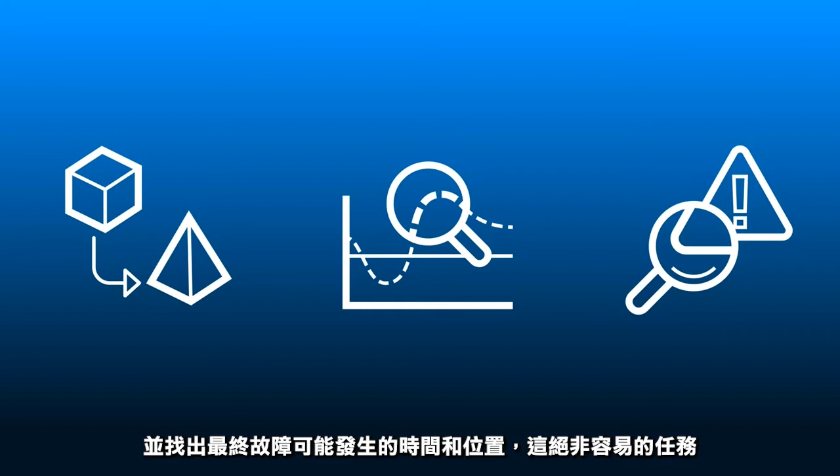When you test your products virtually or in the real world, naturally you're exploring numerous design options, evaluating how long they will last, and finding out when and where ultimate failure may occur. And it's no easy task. When simulating numerous physics and loading scenarios, collecting and making sense of all the data can be daunting and time-consuming.

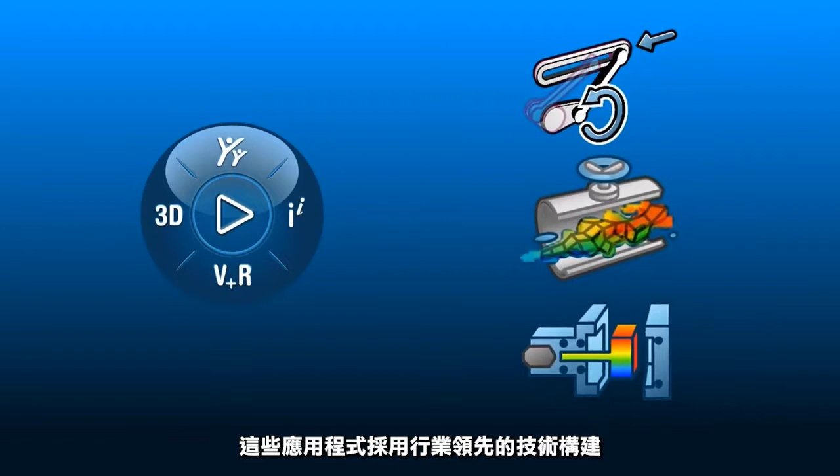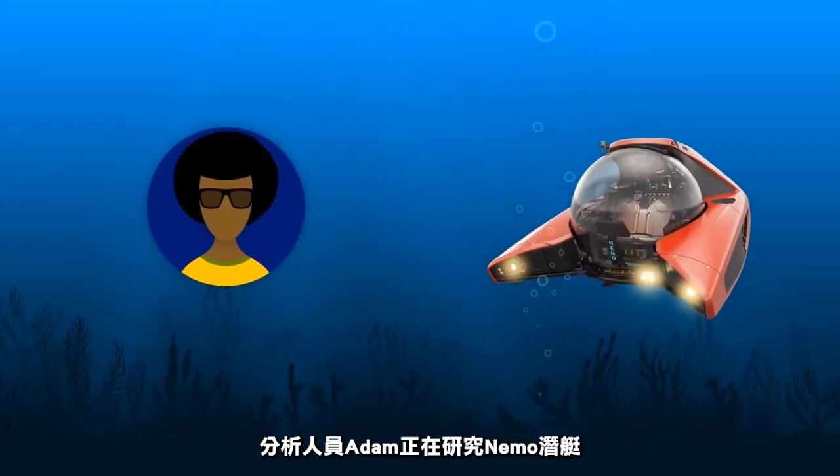This is especially the case when the design and analysis tools are disconnected or limited. But there is a better way. The 3DEXPERIENCE platform provides a collection of best-in-class simulation apps built with industry-leading technology, including Abaqus and FE-Safe, and connects seamlessly with SolidWorks. Adam Analyst is working on the Nemo submarine to help satisfy their safety and certification requirements.

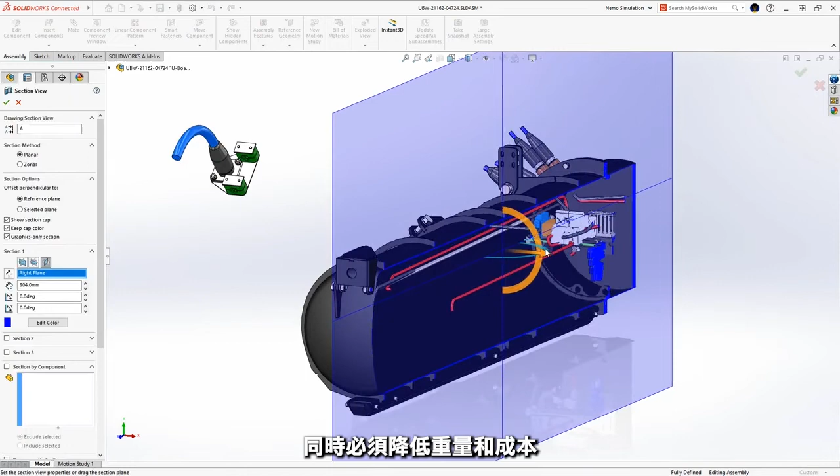When it comes to the battery compartment and skid, he has a few remaining tasks. With a depth rating of 100 meters, it is critical that the battery compartment can withstand the pressures beyond that depth to ensure safe operation. At the same time, weight and cost must be reduced wherever possible.

Adam considers the thickness of the steel tube and stiffeners, and defines the associated dimensions as parameters to be optimized. He saves the updated model to the platform and launches the Model Assembly Design app to start the simulation process.

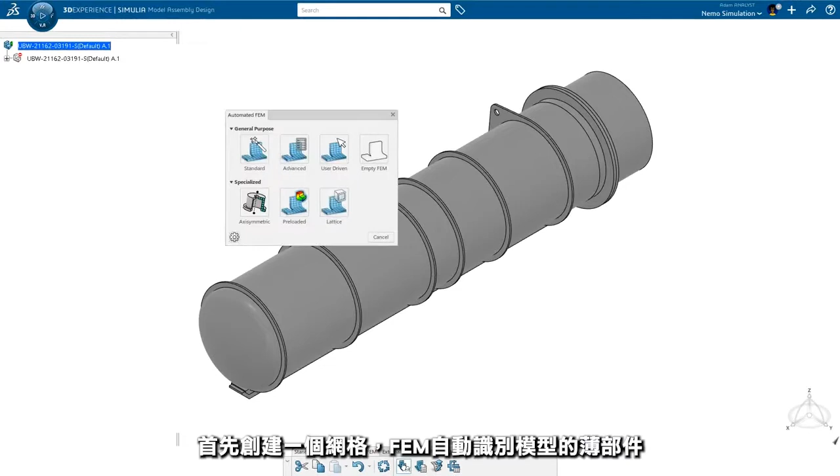First, a mesh is created. The automated FEM recognizes the thin components of the model and creates mid-surfaces and associated shell mesh bodies all in one command. Next, Adam creates the structural scenario that defines the loads and boundary conditions to simulate the maximum designed depth rating.

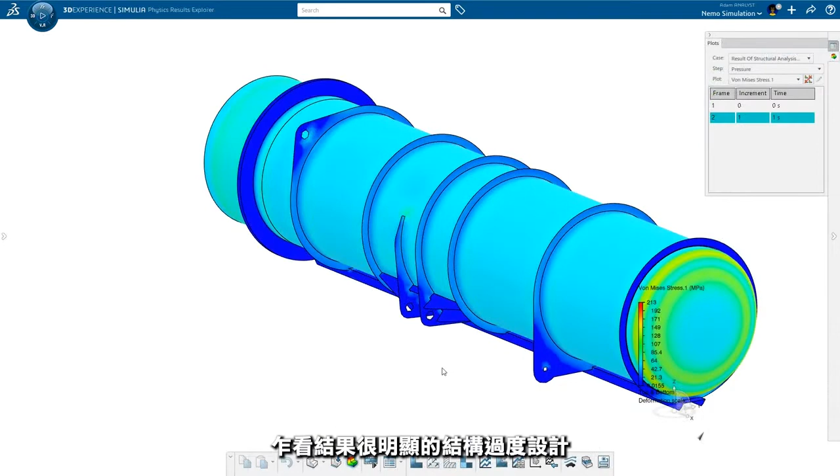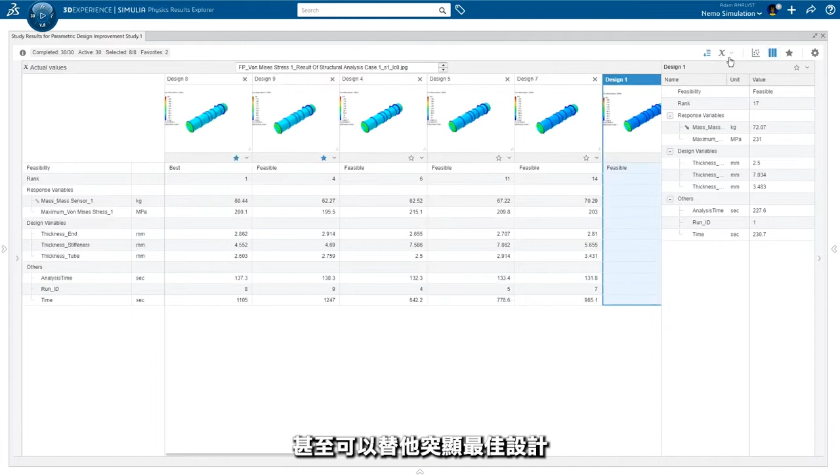At first glance of the results, it is obvious the structure is over-designed. Adam launches the Parametric Design Study app, selects the parameters and goals of interest, and lets the computer do the rest of the work. When the study is done, Adam can easily interpret and compare the performance of the various configurations. The best design is even highlighted for him, and with one click, a new model and study using the optimal parameters is created, so Adam can take a closer look.

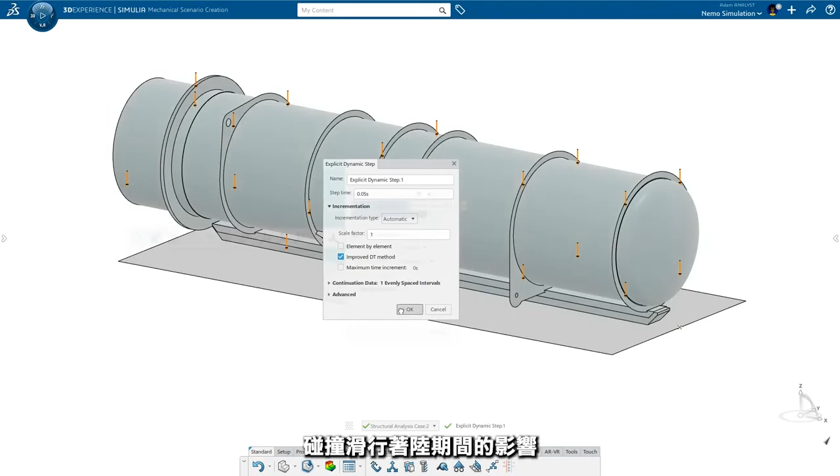But he has additional tasks to complete first. The pressure load on the battery compartment happens multiple times throughout the life of the Nemo. Another loading condition that repeats is the impact of the skid landing during storage. To simulate this secondary loading condition, Adam creates an explicit dynamic study to accurately capture the rapidly changing stresses of the landing cycle.

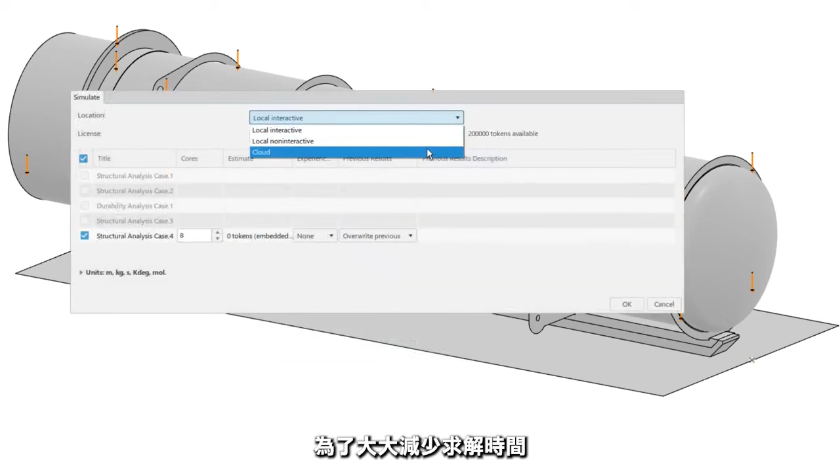How exactly does the skid come in contact with the floor? Adam lets the solver figure that out with one simple yet powerful general contact interaction. To greatly decrease the solve time, Adam chooses to run the simulation on the cloud, leveraging its high-performance computational power. Adam can even shut down his computer while the simulation runs.

The stress values are within an expected range. But how many times can the Nemo withstand both this and the pressure load? To reveal the answer, Adam sets up a durability study.

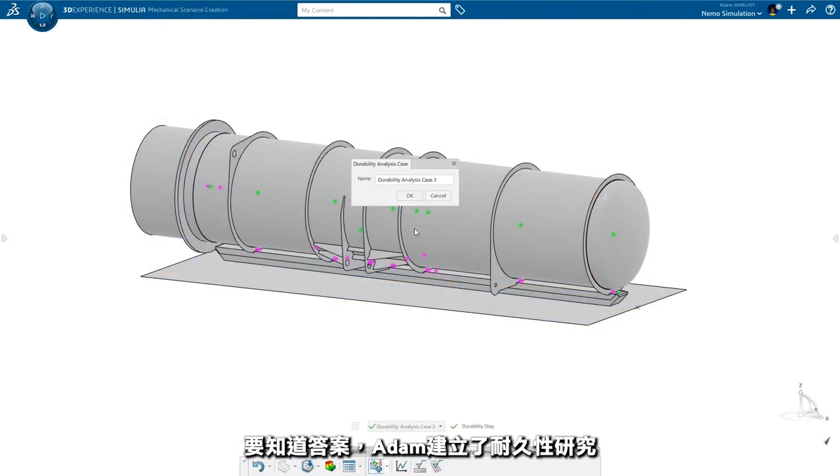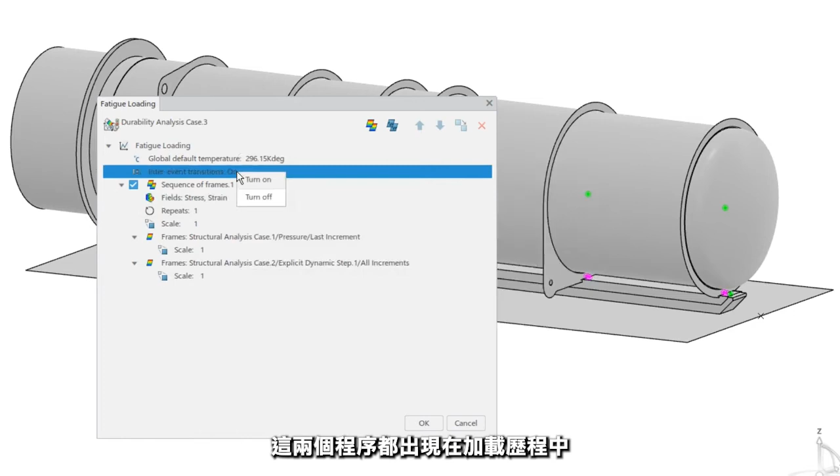He defines a fatigue loading that captures both events. For the explicit dynamic results, he includes all increments to account for the fluctuations in the response. Adam also includes both stress and strain in the calculation to improve the accuracy and solve for both high and low cycle fatigue. Both sequences occur in the loading history, but they are exclusive events, so he turns off the inter-event transition option. Lastly, he defines the base surface finish and solves for the results.

The results are not only available to Adam, but they may be viewed by other collaborators from their internet browser, so everyone can get the latest information instantly from one place.

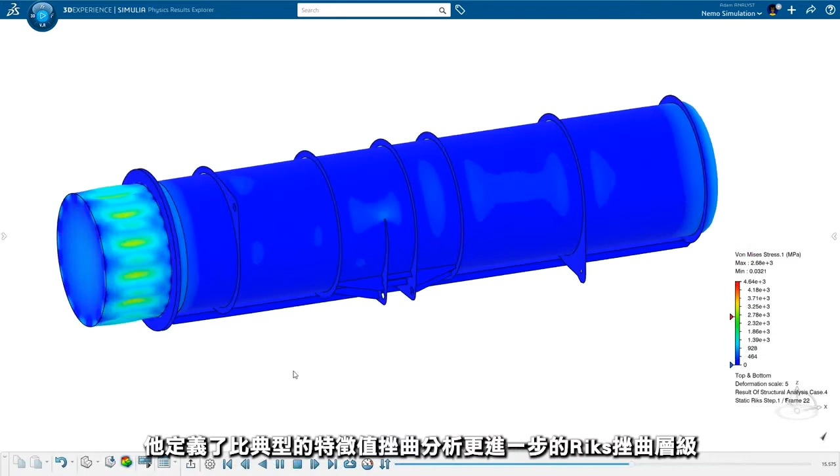Adam's last task is to identify when and where ultimate failure may occur if the Nemo gets too deep. Leveraging the same study setup from the first scenario, he defines a Riks buckling step, which goes further than the typical eigenvalue buckling analysis. And it's well suited for an unstable and nonlinear collapse of the structure. And it doesn't require setting up a more complex dynamic analysis.

Processing the results is simple too. Adam plots the load factor and visualizes which areas of the compartment will fail first.

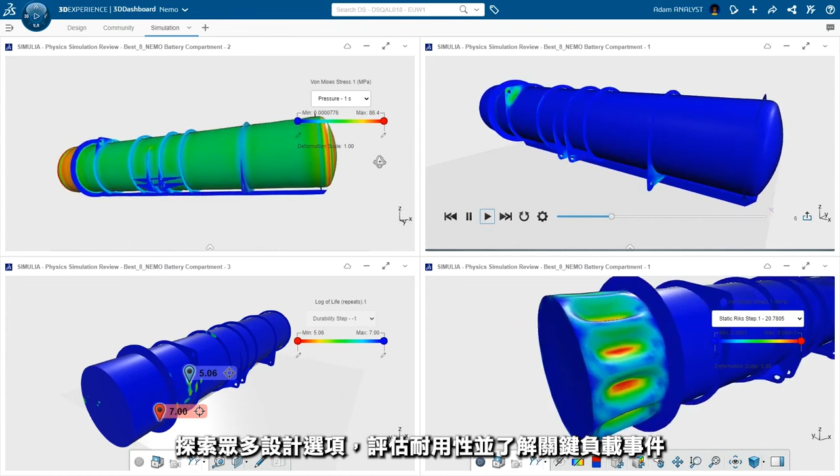By using the 3DEXPERIENCE platform to explore numerous design options, evaluate durability, and understand critical loading events, Adam and his team were able to make informed, timely decisions to help fulfill their safety and certification requirements.